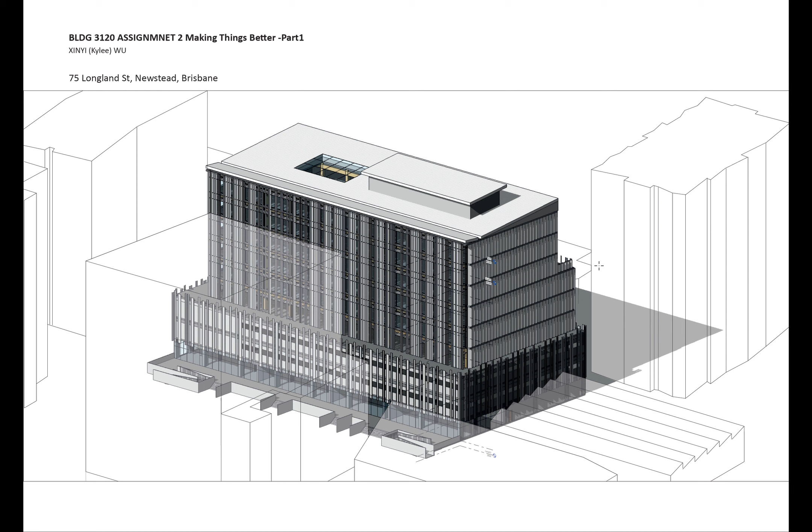First of all, let's look at the evaluation. So we need more access for people with disability and also accessible car parking. We have to think about how to provide privacy for private meeting rooms and how people can access daylight in the office area. More cross ventilation will be needed and the facade will provide shading for the interior space.

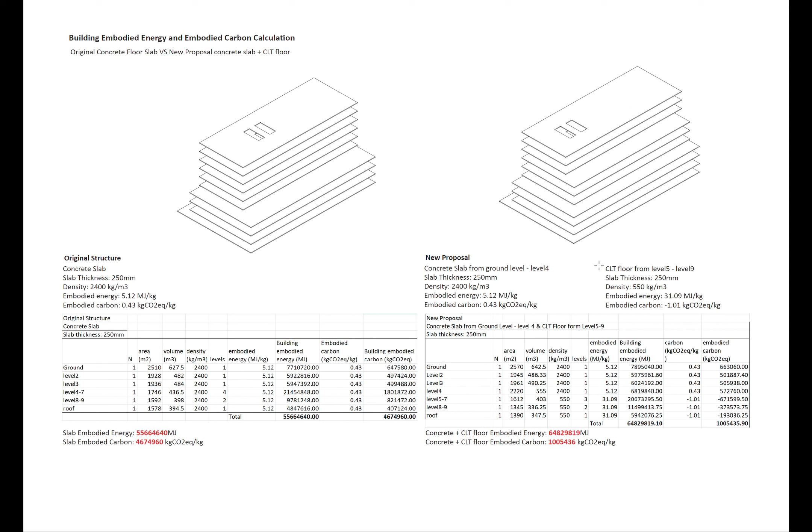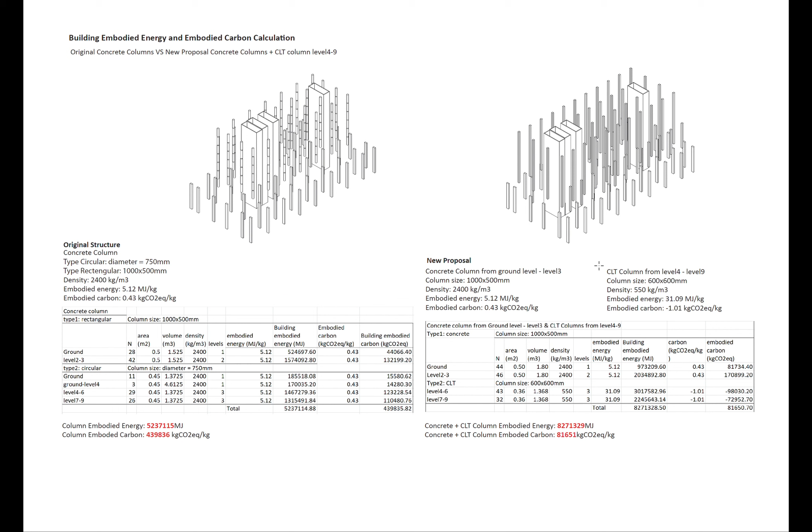For the construction, the concrete slabs have changed to CLT slabs from level 4 to level 9. The car park will remain concrete construction. For the columns, it will also be CLT columns from level 4 to level 9, and beams as well. The embodied energy has increased by 23% and embodied carbon has decreased by 83%, which means the building will be more sustainable and environmentally friendly by using CLT construction.

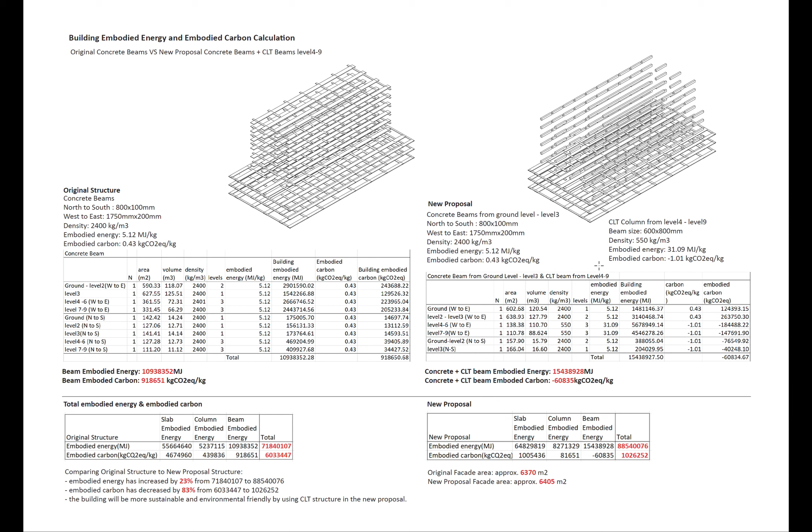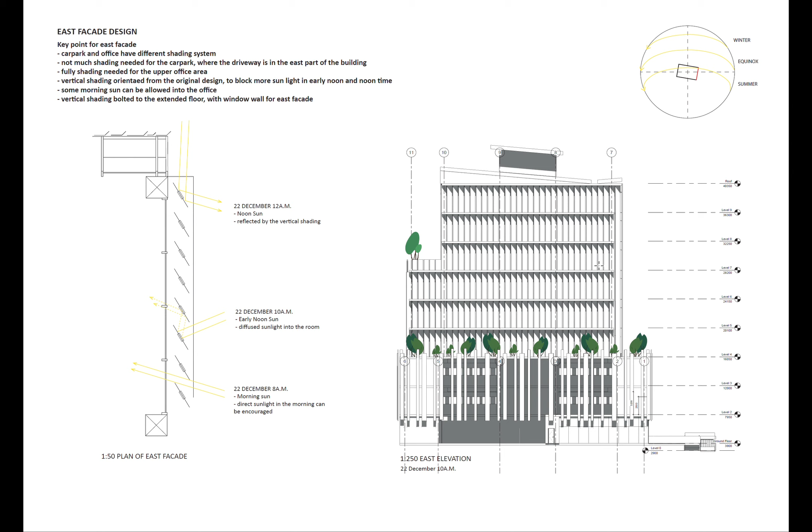The horizontal shading will be provided by the extended floor slab, which is a 600 mm overhang from the beam, and the vertical shading will be bolted to the extended floor slab.

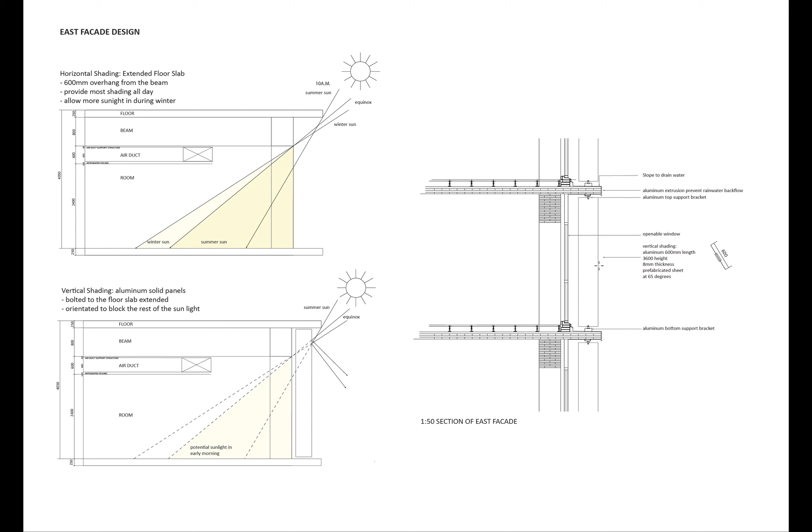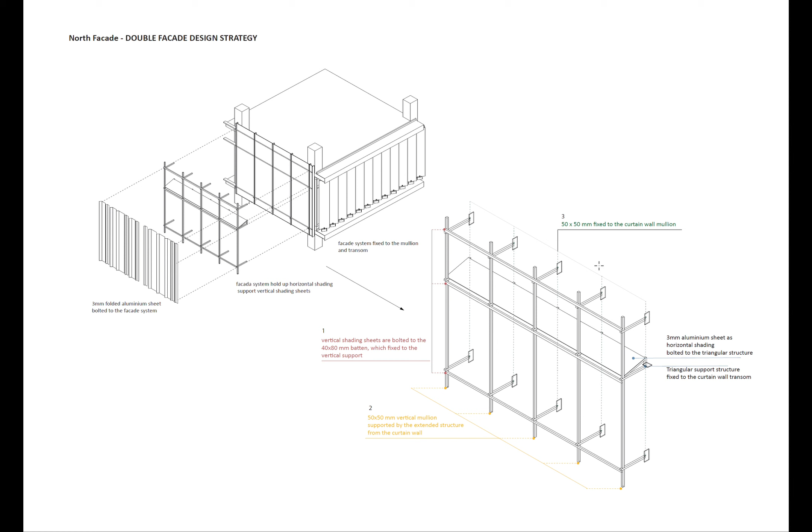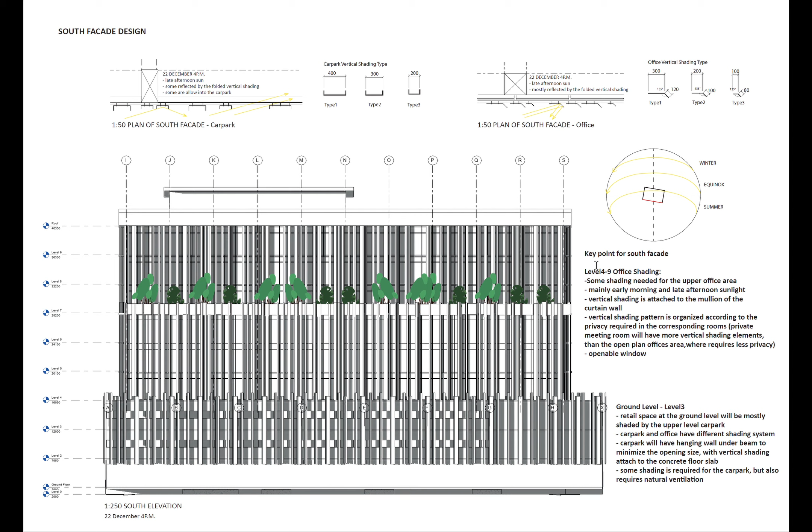For the south facade design, there are 2 sections. The first section will be the car park, where we can see the aluminum sheet is bolted to the battens, which connect back to the slab and the hanging wall in the car park. For the upper office area, the aluminum sheets will be connected back to the transom of the curtain wall.

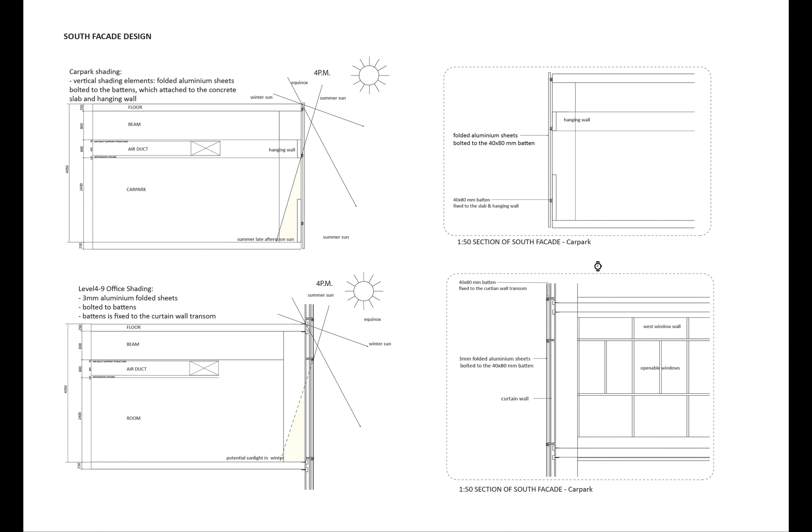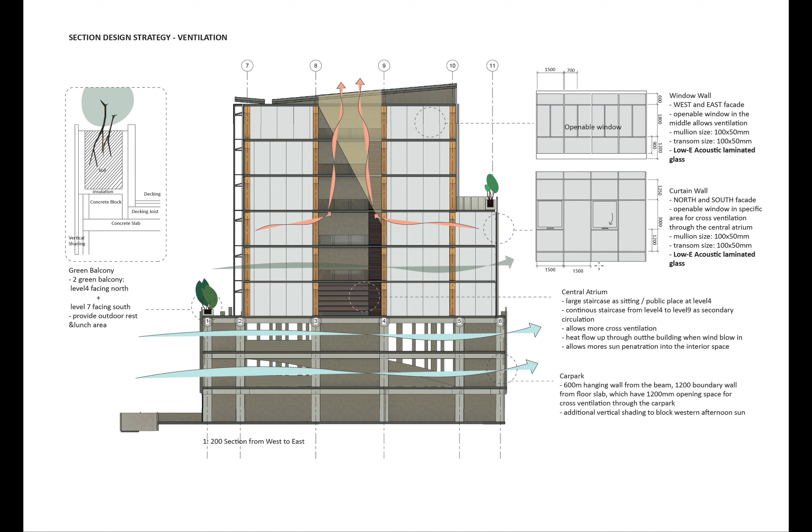In this section, we can see that the central atrium is designed to release heat from the interior space. There will be window wall on the west and east facades and curtain wall for the north and south facades. And on the 4th and 7th floor, there will be a green balcony, which provides shading and allows an outdoor resting place for the people.